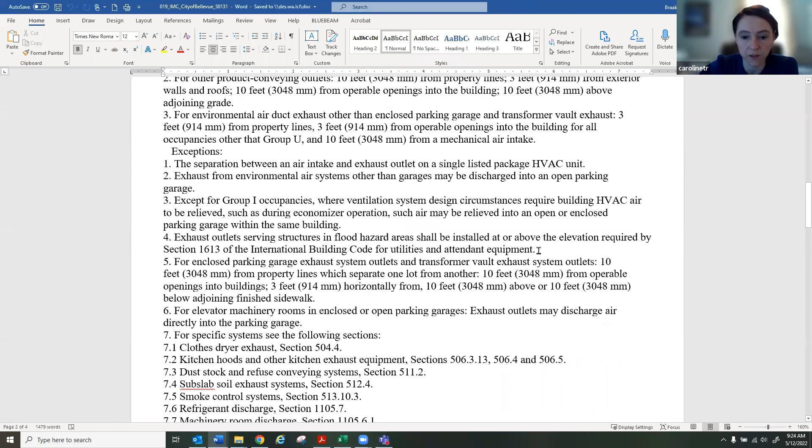All right, so we are on to proposal 19 submitted by the City of Bellevue about transformer vault exhaust. So I think maybe Valerie, this one's you. Yes, this was my attempt to link transformer exhaust to the IMC. The IMC doesn't mention transformer exhaust, and the only mention is the state amendment. So this is an amendment to the state amendment.

And I thought it would be good to separate parking garage exhaust and transformer exhaust because they are two different things. Garage exhaust is environmental and transformer exhaust is its own thing. It has two different purposes. It is heat at one point and it's fire and explosion at another point.

So one thing I looked at was NEC. I linked it to NEC 450.45 because that's where all the requirements for transformer exhaust are located. And if you were a mechanical engineer or inspector, you wouldn't have that link to NEC to check or design it. Only the electrical engineer and inspector could do so.

I don't know if the whole state has adopted NEC, so I wanted to bring that up. I don't know if the whole state of Washington uses that electrical code. And then I separated it from garage exhaust. I did add an "or" in garage exhaust because that was kind of confusing. And Eric, I'm glad you're here because you helped write that one. The 3 feet horizontally or 10 feet above adjoining grade for garage exhaust.

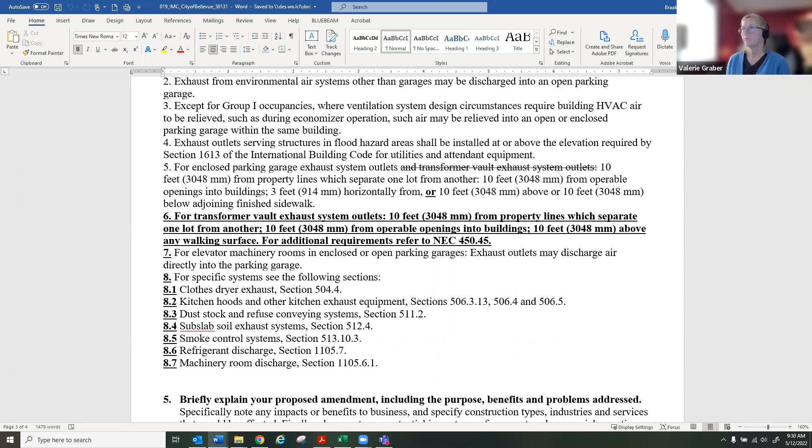Yes. Okay. Transformer exhaust should not be lower than 10 feet above a walking surface. It is to protect people from walking by it in case something happens. Under normal circumstance, it's only heat, but if something happens, then it's not just heat. Sorry, Eric, go ahead.

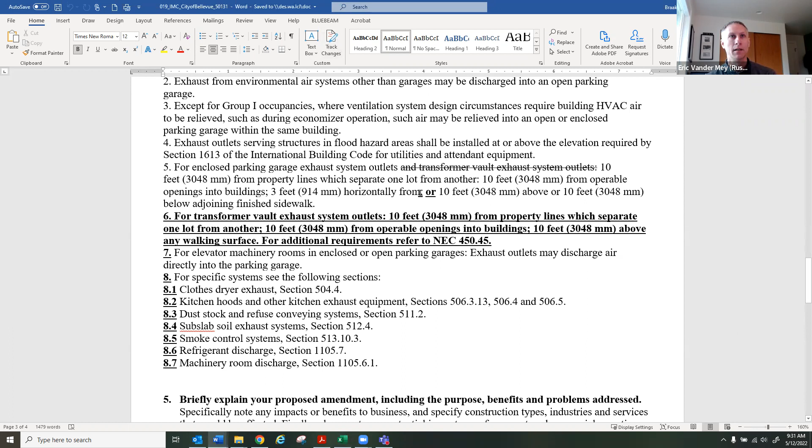Yeah, so I know there's been lots of discussions on this in the past. A couple of editorial comments, I guess, first. So do we need the comma on item 5? Do we need the comma before or should we remove that? I think it probably needs to be removed. Okay. And then

As far as the discussion, we have had lots of discussions on the transformer vault exhaust in the past. Is it actually an engineered explosion vent, or is it just a means for relieving smoke out of the vault if there happens to be a fire in there? So generally, I would agree that, I don't know, do we always want them 10 feet above any walking surface? The walking surface language, we may want to use the same language that's in item 5 and say above adjoining finished sidewalk, and not introduce some new terms. I guess that would be more of an editorial comment.

Yeah, do we need language? A question would be, there are buildings that aren't in a zero lot line condition. I guess most of those don't have transformer vault exhaust, so maybe we don't need to worry about that. I would remind folks that we do have a lot of naturally ventilated transformer rooms that don't have any exhaust, where the rooms are right on the building perimeter next to the sidewalk also.

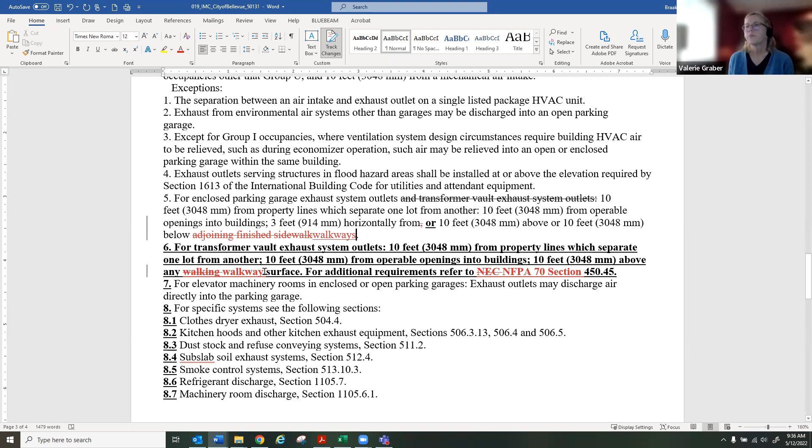Okay, I can rewrite this one. Are we rewriting it now? Can it just be walkways in item 6, or does that have to be surface? No, it could be walkways. That makes more sense anyway. And should the word any be there, or is it just above walkways? Yeah, just remove that one.

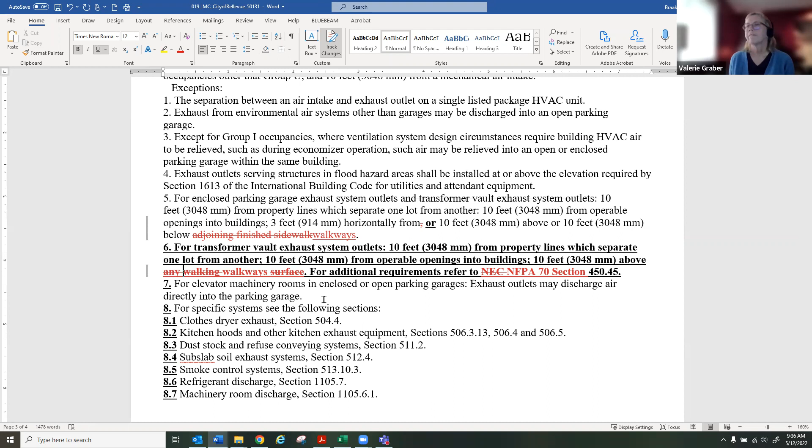So one other potential editorial, I was just looking at where else in the mechanical code it references NFPA 70, and just the last sentence. I don't know if typically we have things that just say refer to. Referenced in the references. Yeah, I thought of that too. There is no NEC in the references. We would have to add the reference.

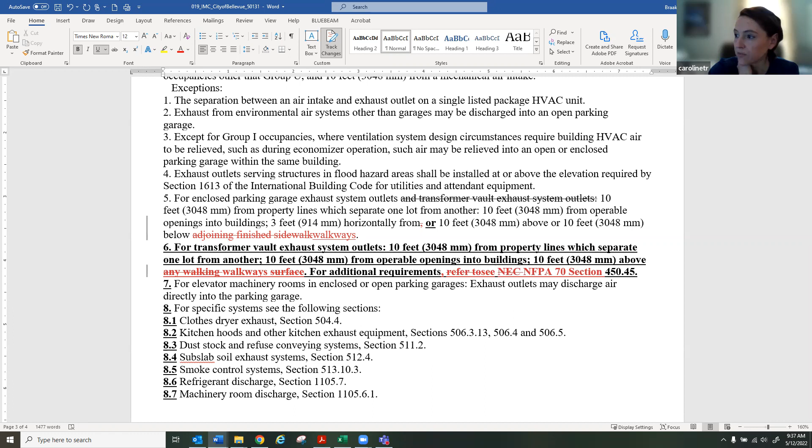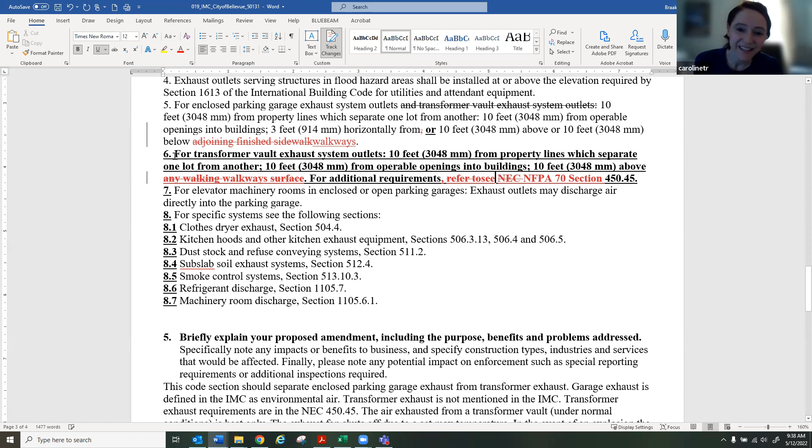There's another section in 513 where it's written, in addition to meeting the requirements of NFPA 70 section 450.45, just as an example, like we could put that at the beginning of item 6. I don't know that that is super clear, but I think it's kind of like FYI, go look at NFPA. Yeah. And just trying to make it seamlessly in there.

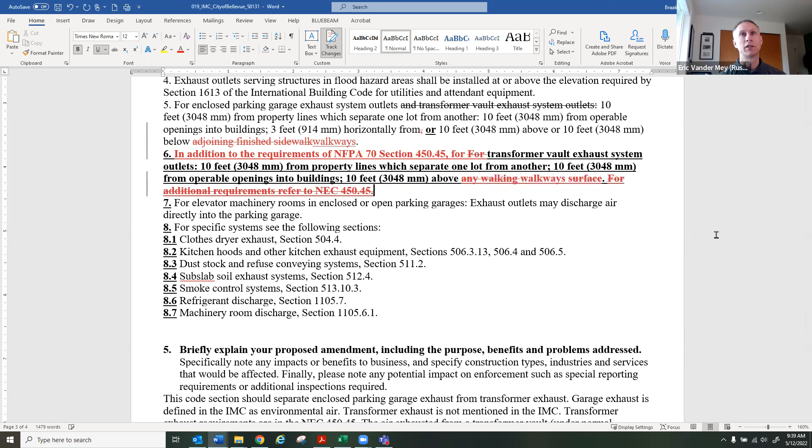Just as an option, in addition to meeting the requirements of NFPA 70, section 450.45, comma, for transformer vault exhaust system outlets, and then the rest. It's not super elegant, but what do you think about that? So I just left both of them in there so you can kind of compare them. Yeah, that works. Okay. Eric, do you like that? I don't know if you need the word "for" anymore. It would just be transformer exhaust system outlets.

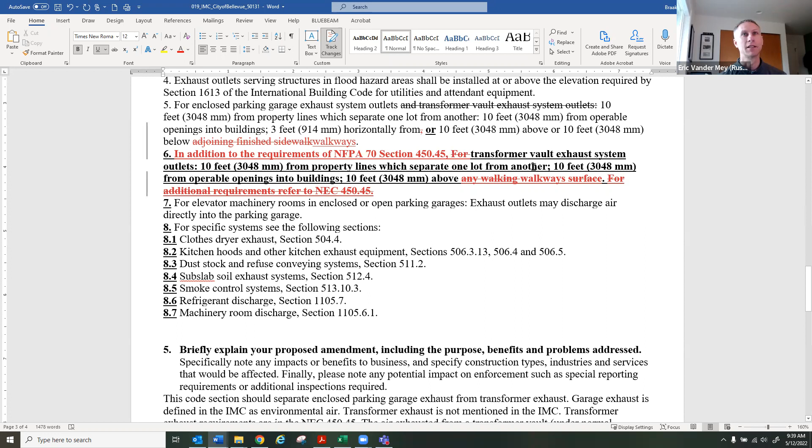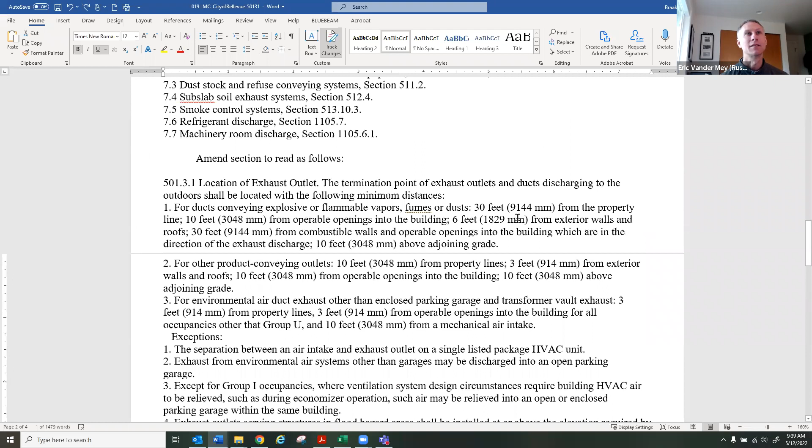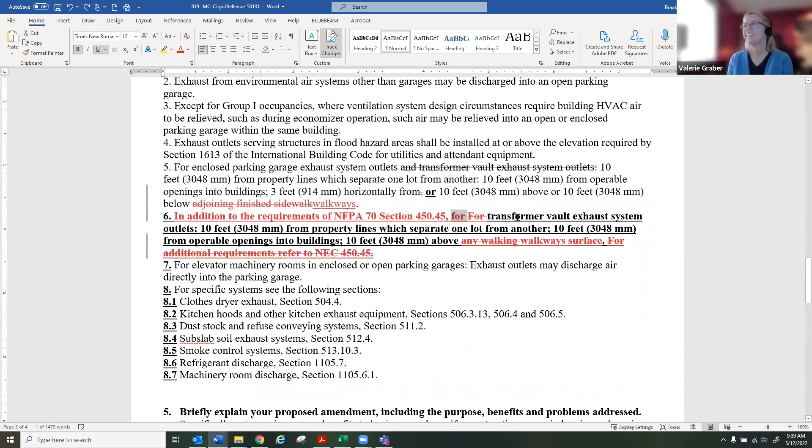Yeah, we use for on all the other enclosed parking garage ones. Yeah, scroll up to the beginning of this section. We've got for in all of them. Yeah, so they're all written as a continuation of that first statement. So maybe it's better to have it at the end. Yeah, it could also go for transformer vault exhaust system outlets, comma, in addition to the requirements of NFPA 70, colon. Yeah, okay. Maybe that's better, so it has the consistency of starting in the same way.

Yeah, it looks better that way. Okay. Any other thoughts or questions for Valerie on this one, from anyone else? All right. If not, I guess we are looking for a motion to recommend or not recommend this move forward.

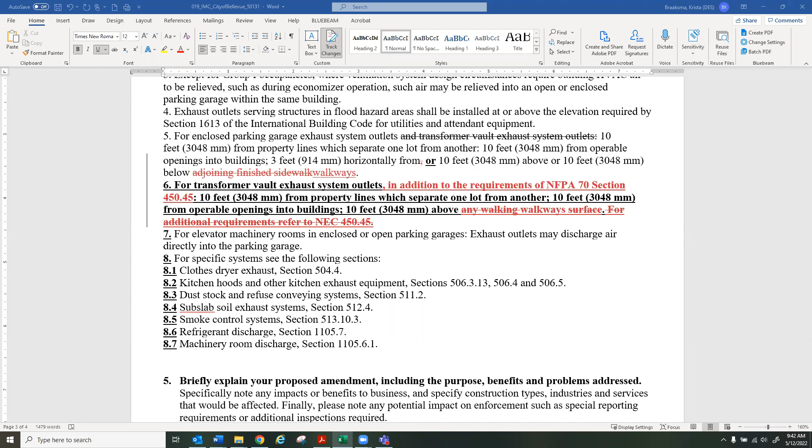Thank you, Chris. Is there a second? Jeff will second. Thank you, Jeff. All those in favor, please say aye. Aye. Aye. Any opposed? Please say nay. All right, motion passes, and this one will go into the recommended pile.

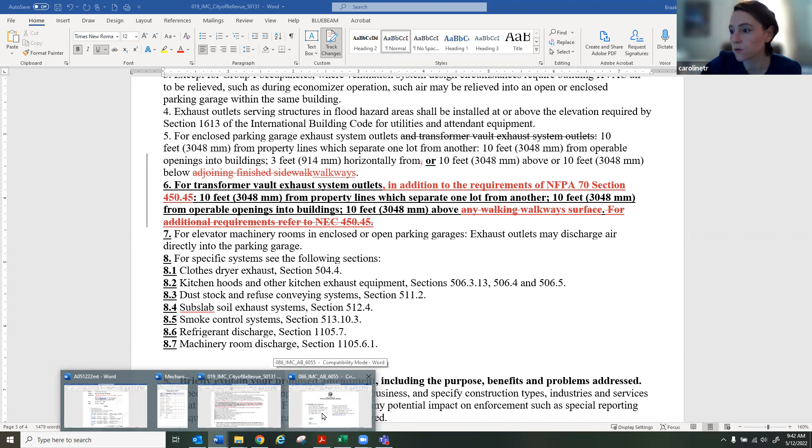So I think that moves us forward on to 2 proposals, one from Austin, which Eric, I assume you'll speak to, and one from Mike Fowler, both pertaining to the new section 605.5 about smoke filtration. So Eric, you want to talk about Austin's first?

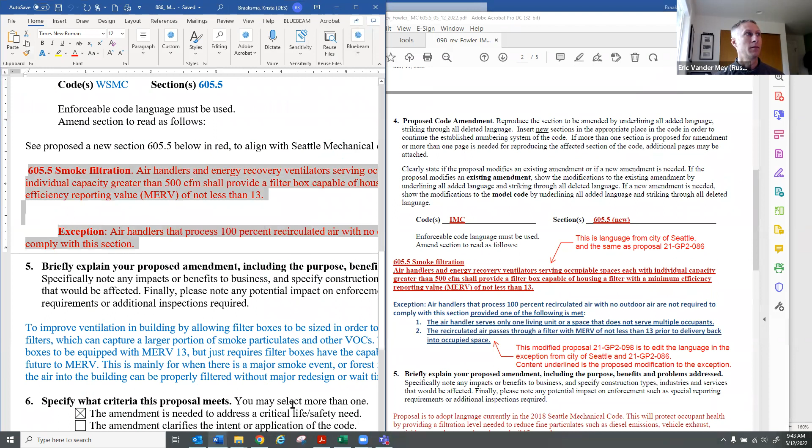Yes, this language is coming from the 2018 Seattle Mechanical Code, which requires air handlers and ERVs serving occupiable spaces, and that are larger than 500 CFM, to have the capability of installing a MERV 13 filter. It does include an exception for recirculating air handlers that are not bringing in outdoor air; they do not have to have this capability. They would just have to comply with the previous section if they have wetted coils for, I believe, the MERV 6 filtration,

consistent with 62.1. So again, this allows a higher level of filtration to address wildfires in the state, and folks being able to install a MERV 13 filter, but would not cover small ERVs or air handlers that are less than 500 CFM per our proposal. So minimal cost impact for these types of units; this is just having a filter rack that's capable of accommodating a MERV 13 filter. It would be up to the owner or user to decide if they want that level

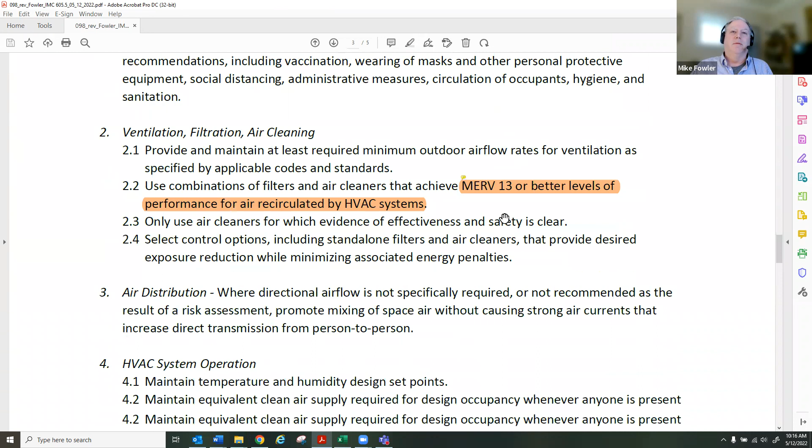Yeah, absolutely. So yeah, Mike's proposal does have some cost benefit in it, which would address. So we could go through that in more detail. It's just an example of what is the cost difference between a MERV 8 and a MERV 13. It's fundamental, like off the web. It's nothing in depth. It's just to say that you're going to pay a little bit more for a MERV 13 than you would for a MERV 8. That's essentially it. Yes, it costs more, but it's better. It's recommended by ASHRAE.

Well, I guess, Mike, would you want to take the lead on revisiting some of your language to address some of the issues that were raised with it about different system types, or potentially work with? I'd be happy to. Yeah, Krista contacted me just when the agenda started going out, to say, hey, you and Austin have a similar proposal. Can you talk? Should I remove mine? I'm like, but we're addressing two different things.

One is, I completely agree with MERV 13 for smoke, and not just smoke season, but all year. But I also think that because of ASHRAE's task force, the recommendation is for recirculating air to be filtered to MERV 13 as well. That's why I wanted to keep both and have this discussion with this tag. So yes, I'm happy to explore the language.

It's only been since last week, Thursday, that Austin and I started to have a conversation about it. The exceptions I propose are not 100% there, but I'm hopeful that you feel it's more than 50%, at least in the right direction, and then it could be modified. And yes, I'm happy to bring in more people to be part of that discussion, as you said earlier, potentially homework.

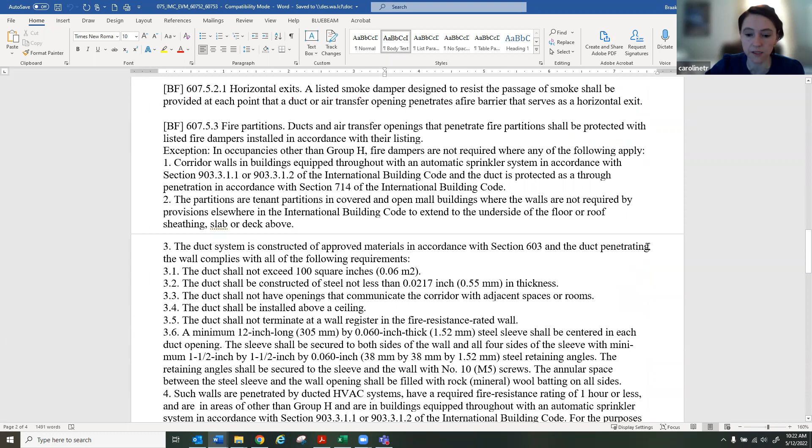Okay, thank you, Caroline. And then Eric, you said contact you and Austin, but do you want to open this up to any other mechanical engineers within the region as well? Or I don't know, how do you feel? I mean, I'm happy to do that. Anybody who wants to volunteer on it, that would be fine. Okay, yeah, just to get some more input. Okay. All right, thank you, everyone. Yeah, is there anyone else here on the TAG who wants to volunteer to provide some input on that tonight? Who's interested in that? I might be able to be of some help. Mostly I know what I need, not how to accomplish it.

Thanks, Nate. Mike, I can help on the equipment side. If you need some selections or whatnot, I can help out with some guidance of what those pieces of equipment would look like, with and without MERV 13 filters. Okay, thank you, Brandon. So I got Brandon, Nancy. Okay, great, thanks, Mike. All right, thank you.

Okay, that moves us along on the agenda to proposal 75. And this is about fire barriers and fire partitions. So I think, Eric, you get to share this one as well. Okay. So this is a proposal to try to clarify what's commonly known as kind of the pass-through rule for using ducts of a certain gauge to pass through. I guess in this case, what do we got? Fire barriers and fire partitions.

Unfortunately, I didn't have a chance to put together some diagrams to explain this, but what I've always found hard to imagine about this is, they reference that you can't have flex connections. Essentially, they want it hard ducted the whole way, all the way out to the air terminal. So technically, if you read the letter of this language, no matter how far you are from that rated wall, you have to maintain that hard duct. So for example, I could come 6 inches past that rated wall and have a direct opening with a sidewall supply grille, but I can't run 100 feet past that and then have a piece of flexible duct out to my diffuser.

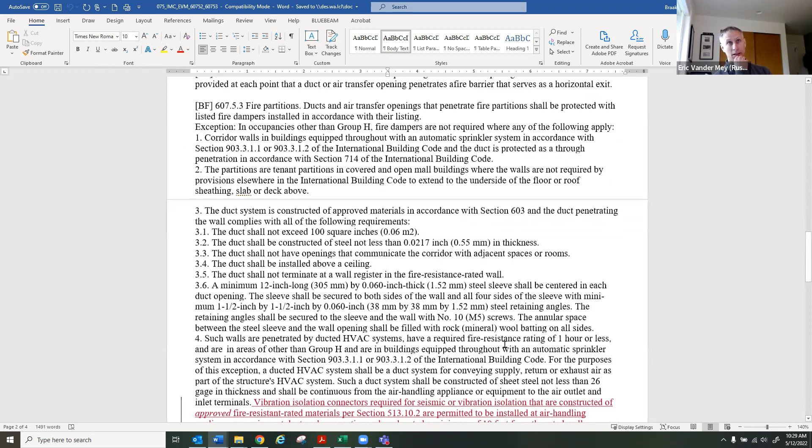Okay, yeah, I think that might make sense just because there is a fair bit of new language there. I was looking back at our significant changes report and we did adopt this change. So if this adequately addresses your concern, then maybe this one can be withdrawn, but definitely take the time to figure out how you want to proceed. Yeah, so it looks like they modified just the fire barriers one and not the fire partitions one in the 2021.

Valerie, would you be willing to meet with me on this one offline and come up with something? Sure, definitely. This one's always given me a problem. Yeah. Okay. Any other comments or issues anyone wants to bring up for Eric and Valerie to consider before we table this one?

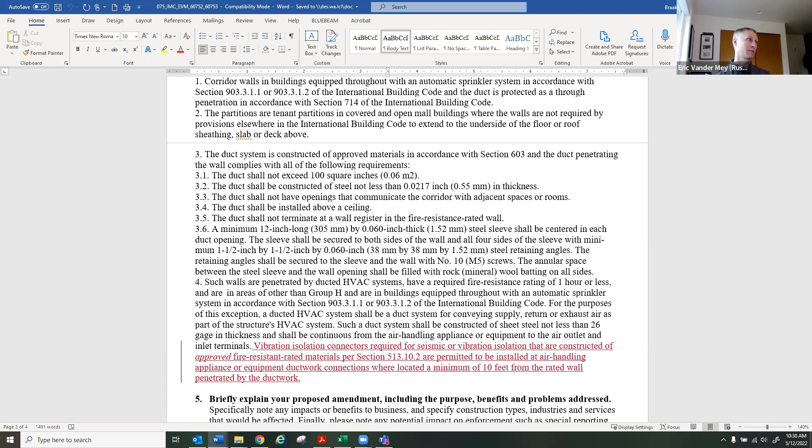All right. Looking for a motion to table. I make a motion to table. Thanks, Valerie. Second. Thanks, Nancy. All those in favor say aye. Aye. Aye. Aye. Aye. Any opposed? Okay, great. We will return to this one.

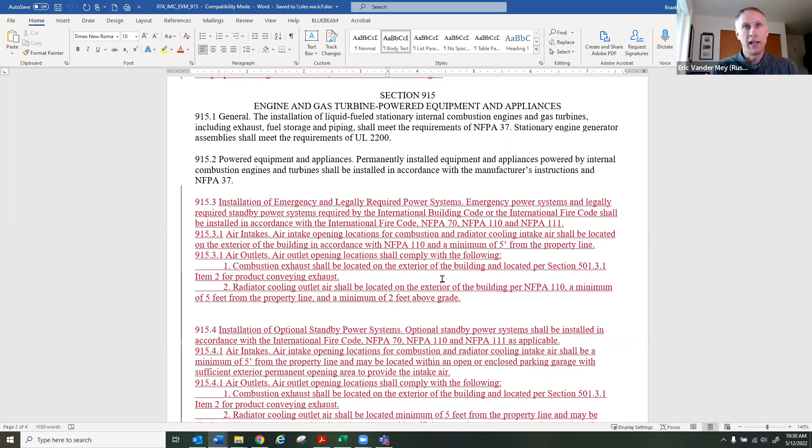All right, so I think next up is proposal 74, which pertains to IMC section 915, engine and gas turbine. So Eric, take it away. Yeah, so this is an attempt to reference some NFPA sections, which are referenced briefly in the building code, mostly for emergency and optional standby power generation systems. One of the challenges here is NFPA standard 110 is written in NFPA language and not in building code language. So there is much confusion when you read NFPA 110 for some of these items and how they should be enforced.

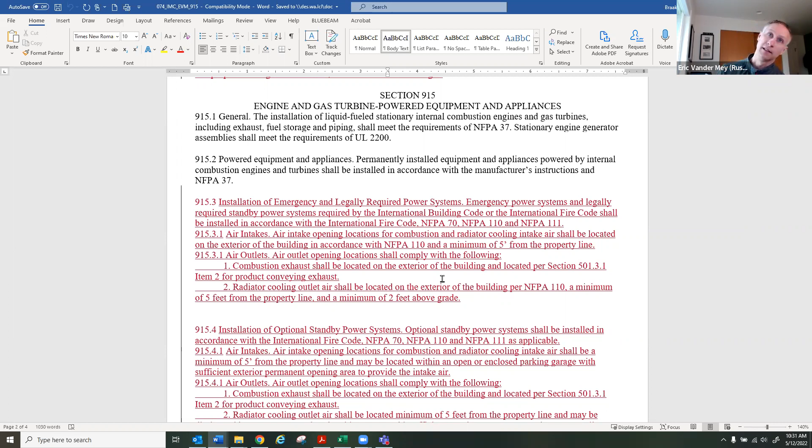So again, this is mostly pointers to those codes and then some clarifications on how we treat generator air intakes. So there's air intakes for both the combustion air and the radiator cooling air, and then discharges for the combustion air and which section that falls into, and then the radiator cooling outlet air. It's my opinion that the radiator cooling outlet air is not really governed at all by Chapter 5 exhaust, because it is not exhaust. It's just outlet air coming off of that radiator. So it's not environmental air. It's none of those.

So this provides direct references. Emergency and legally required power systems have to fully comply with the requirements in NFPA 110. Item 915.3.1 describes that air has to come from outside the building. It can't come from a parking garage and whatnot. And then I provide that it has to be at least 5 feet from the property line, just to provide some direction as to how far from the property line it should be. Totally flexible on that distance and how we want to clarify that.

So then it looks like I misnumbered the next section. It should be 915.3.2, air outlets. So I'm just providing that reference that combustion exhaust would be considered product conveying and need to comply with section 501.3.1 item 2 for product-conveying exhaust. So just provide some clarity as to how we treat the combustion outlet on the generator.

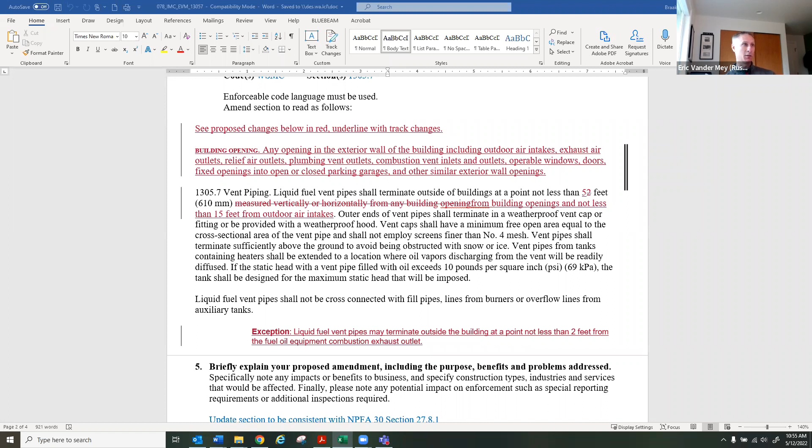So there's a conflict between IMC requirements for where fuel tank vents are required to terminate and NFPA 30. So this is meant to add a definition of building opening so that we have a clear definition for what building openings are, and then make the mechanical code consistent with NFPA 30, to reference the 5 feet from building openings and not less than 15 feet from outdoor air intakes. So we have that consistency between NFPA and our code.

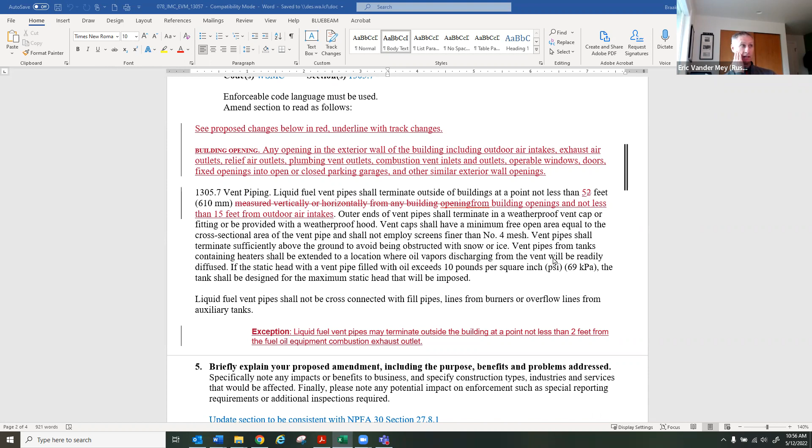And then I have an exception for the fuel vents: they may terminate outside the building, not less than 2 feet from the fuel oil equipment combustion exhaust outlet, so they can be located immediately adjacent within 2 feet of where the generator tailpipe exits the building, because they're coming off of the same piece of equipment. So this helps to clarify how close the generator tailpipe can be to the fuel vents, which are typically grouped together on the exterior of the building.

I got a couple comments. Did you add that definition of building opening to the IBC? I haven't yet, no. It directly contradicts type 1 exhaust terminations, which are fixed and operable openings, fixed windows. Right. So a building opening is, and it's not really defined, but it's in the IBC under building openings. Right, yeah. So I don't like your definition of building opening. A fixed window and any kind of opening in the structure of the building is a building opening.

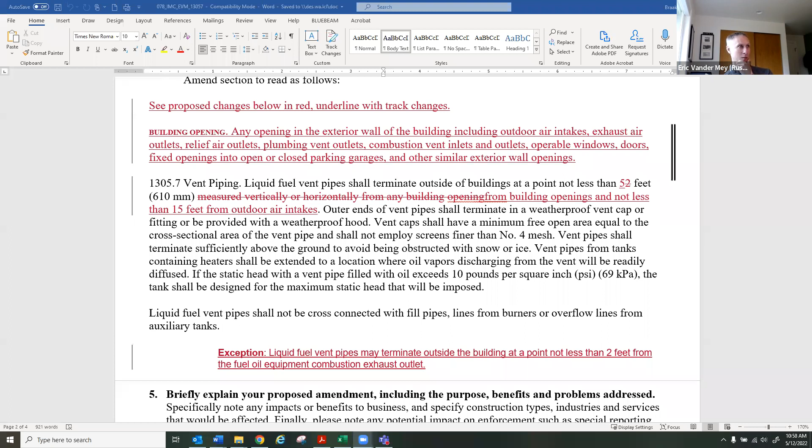And then, yeah, I would agree, Valerie, that the building code has building openings, and they talk about protected and unprotected building openings. And I guess the mechanical code uses building opening. It's used in this instance, and it's also used in chapter 11 with refrigeration rooms. So that's currently the two locations in the mechanical code where building opening is referenced. And then the fire code has this section in it as well under 5704.

And the fire code is 5 feet. All right. So the IMC is 2 feet, NFPA 37 is 2 feet, at least it was the last time I looked at it, might have changed. And then the fire code is 5 feet, and NFPA 30 is 5 feet. They're all different. So yeah, there's 2 references to 5 feet and 2 references to 2 feet. Yes. Okay. It depends on which code you look at. Yeah, it would be nice if they matched.

So did you say 37 has 5 feet? 37 has 2 feet. I didn't look at NFPA 37. Okay. 37 has 2 feet. I missed looking at that one. And then the fire code requires it 12 feet above grade. So these code sections have never matched. The IMC has never matched the fire code. So it depends on what code you look at.

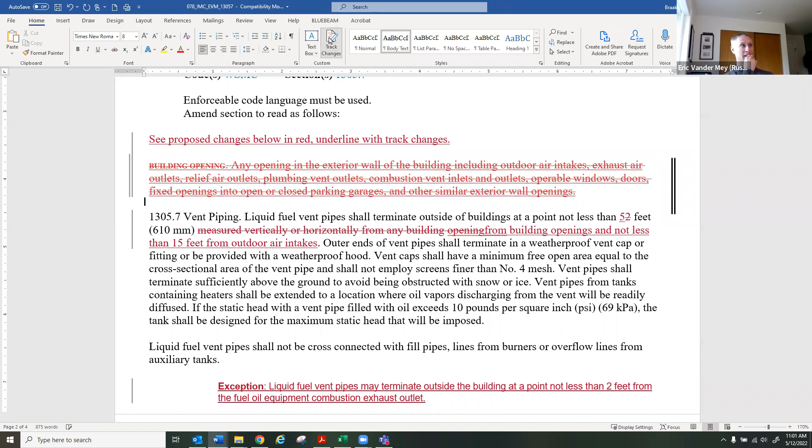And then there's an option to just list the 5 feet and reference NFPA 30. Yeah, you could add the 15 feet. I think it's prudent to have the 15 feet from outdoor air intakes. And then, yeah, then we have to decide on the exception. So.

Thanks, Eric. Any other thoughts or comments on this one from anyone? Excuse me, I have a comment. Does this refer to a normal vent pipe or emergency vent pipe or both? Just, yeah, the code just refers to vent pipes. So it would apply to a normal or an emergency, is my understanding. I mean, oftentimes the emergencies on UL 2085 tanks are within the generator room as allowed, but anyways.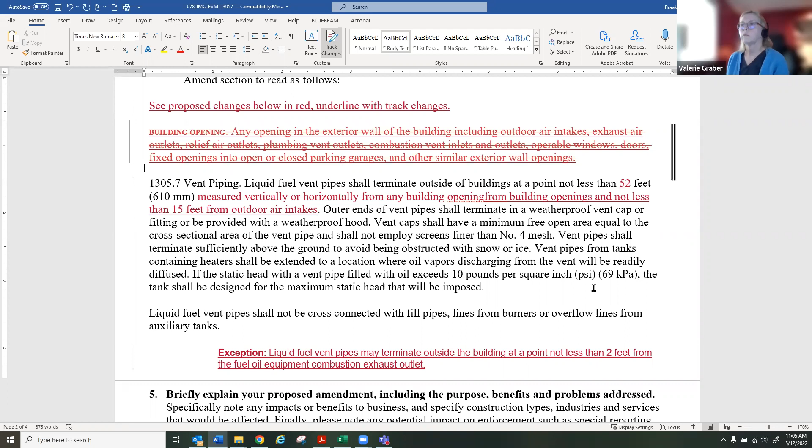Okay, I'll move approval then. I second it. Thank you. All right, all those in favor, say aye. Aye. Aye. Any opposed? All right, motion passes.

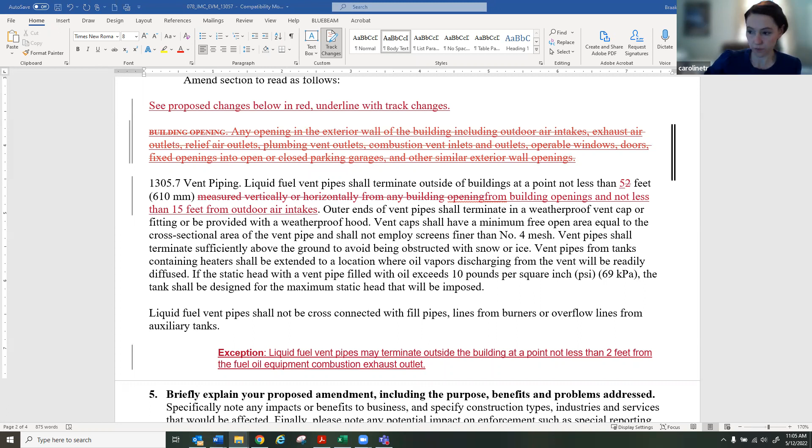Okay, next up, our final proposal for today, which I think we'll just power through here instead of taking a break. So this one is proposal 1 from Kevin Johnson regarding the fuel gas code and a gas valve standards table. I don't know, is Kevin here or anybody here to speak on Kevin's behalf? Krista, were you able to reach out to Kevin or did he respond with interest to consider presenting this? I sent him notification. I did not hear back. Okay.